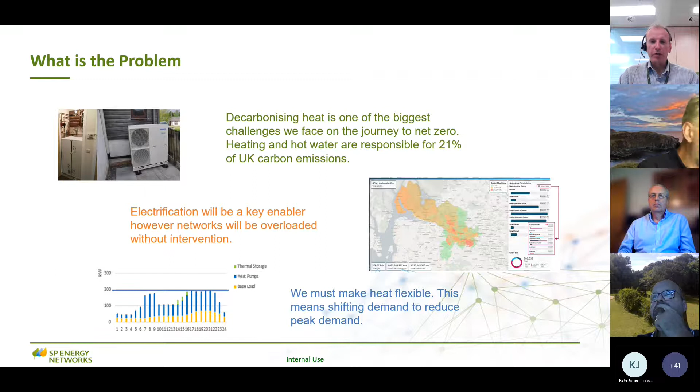And through flexible heat, the method we've been investigating is using smart control systems in conjunction with domestic thermal energy storage to unlock that flexibility from heat. And we've assembled this strong group of partners that you see here to work with us on the discovery phase project. Next slide, please, Kate.

So in terms of the opportunities that we've been investigating, firstly, there's the technical solution as an alternative to network reinforcement, and that's smart control from the DSO regional control system through service provider and aggregator platforms to the end user consumers with the heat pumps and potentially thermal energy storage in their homes.

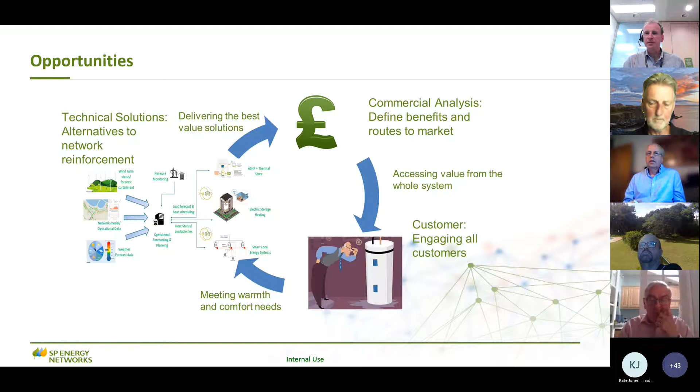We've been looking at the commercial side of things, so how can customers be incentivized to use this solution? What are the benefits, particularly for the electricity networks as well as other parts of the energy system? And we recognise that customers are key to this. Customer engagement is crucial, so we have a specific work package on customers. So I will now hand over to Jeremy Harrison from Delta. Thanks. Thanks, Watson. Okay, next slide, please.

So, as Watson said, the key focus of this project has been about the need to provide flexibility which will avoid or defer network reinforcement. So that is the key priority overall, and that's the one that we note here in terms of the user needs. But there are other benefits and other needs which are being met simultaneously.

So although we focus on avoiding the network reinforcement, in doing so, we also capture some other benefits for the wider energy system, for example, by minimizing curtailment of renewable generation. That has benefits for the ESO and, of course, to wider society. The alignment of heat demand and electricity generation has benefits to the end consumer in terms of possibly lower cost of energy during the periods they need the electricity, and of course, again, to the network operators as well.

And the other benefits there accruing to other participants, other stakeholders in the energy system, right down to the bottom where you have the carbon intensity of the electric heat by shifting the load from high carbon intensity generation periods to lower periods. That has a wider societal benefit. The next slide, please.

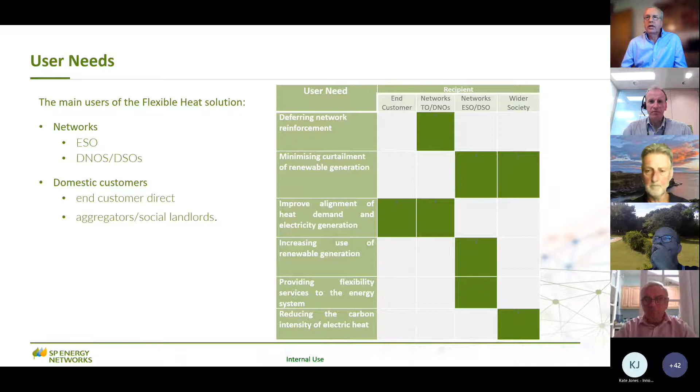So this project is focusing on, as I say, the shifting of load from peak to off-peak periods to defer network reinforcement. And this is predicated on the assumption that the decarbonisation of heat through electrification is by replacing natural gas-fired boilers in central heating systems with heat pumps using renewable electricity.

So just as a baseline here, a diagram for those of you who aren't familiar with them, typically in a normal central heating system, you have a gas boiler with a primary circuit feeding radiators with hot water, and also within that circuit you have the domestic hot water cylinder providing sanitary hot water, and sometimes a buffer tank to provide some sort of capacity in the system to manage the way the heat pump works. So this diagram here shows the baseline operation with a central heating programmer deciding when the heat is required and the temperature it's required at, but with no communication to the outside world.

So there are two components here. One is looking at the way in which we manage that controller from what Watson referred to earlier, the regional control platform. But then there are also the physical assets, the storage of energy in terms of the domestic hot water cylinder, the buffer tank, and also within the fabric of the building itself.

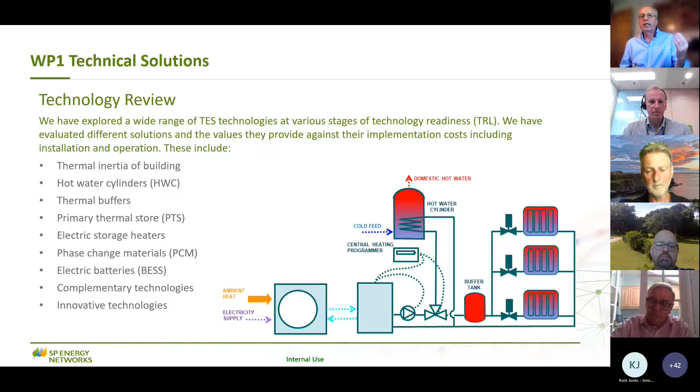So the technologies we looked at, starting off in a kind of hierarchical fashion with the simplest interventions. So using smart controllers to capture the value of the thermal inertia in the building itself, because we believe this is clearly the lowest cost intervention, and then progressing through the hot water cylinders using thermal buffers and then primary thermal stores and other technologies, including more advanced concepts like phase change materials, and also indirectly using electric storage as a kind of a proxy for the heat. And we also looked at a number of complementary technologies and innovative technologies, and as I say, in a hierarchy from the lowest to the highest cost. The next slide, please.

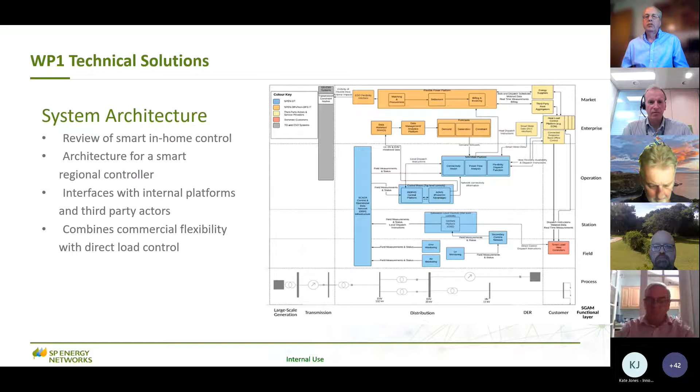And then, of course, there's the overall control platform. I'm not going to talk very much about this because I think that Kenny from Connected Response will talk a bit more in a second. But just to say that the layers that we're looking at are the intervention with the home central heating programmer using a behind-the-meter technology, and then aligning that with the demands of the wider network. And of course, in between that, there is some kind of mechanism which combines the commercial flexibility, adding an economic dimension to the smart control. Next slide, please.

And the simple conclusion that we found, not a great surprise, is that it is possible to use the thermal storage technologies to provide some level of avoided peak load. What we wanted to demonstrate, though, was whether that was going to be a more cost-effective solution than network reinforcement. And in simple terms, this summary of one of the scenarios shows from left to right the simplest intervention, the one in relatively dark blue there with the 688 above it.

That was for a simple controller which simply switches off the heat pump during periods of peak demand to reduce the demand on the system, and uses the thermal inertia of the building to maintain a certain degree of comfort during that period. But of course, it's a fairly crude solution, and some people may find that that doesn't give the level of thermal comfort that's necessary.

The next solution there, the one with the NPV of 1231, that is a smart controller applied to the same concept, which is to use the thermal inertia of the building, but rather than just switching it off, we elevate the temperature of the building prior to a peak demand period so that the temperature can then just drift down gradually.

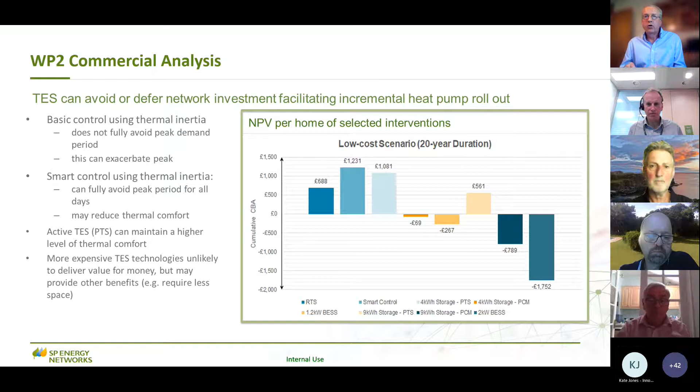Thanks, Jeremy. I'm Kenny Cameron, the Managing Director and co-founder of Connected Response. Our key focus is in the 1.5 million homes in Great Britain that have electric storage heating and hot water by fitting smart controls to improve comfort and cost, but also working with the likes of SP Energy Networks on projects in Glasgow, where we're doing a 10,000 flat rollout at a rate of 50 a week with Scotland's biggest landlord.

The starting point on this project as a team was to pose the question, what can we learn from the last major electric heating rollout, which was the rollout of storage heating in the 1980s, there or thereabouts. And the lessons from history on that would be that with hindsight, it was never really about customers. It was all about disposing of surplus nighttime nuclear generation. And so we were determined in this to say, if this is an even bigger rollout that has to be done, how do we take customers with us?

And for any of you that have lived with storage heating, you'll know what I'm talking about. No one in this day and age would ever launch a system and say you can only have our commodity of electricity for a few hours a day, starting at 11:30. So the key message is customers must embrace new technology or it won't happen. They must understand it and they must know what's in it for them. The transition needs to be done with customers, not to customers.

We've assembled a great team in this that Watson talked about earlier on, and a good diverse mix of SP Energy Networks, academics, manufacturers, energy services providers, consultants, and we all come to it with great projects we've been involved in. And when we sat down at a workshop at the beginning of discovery phase, the challenge was to say to all of us, forget all the glossy things, all the wonderful good news stories that we all preach about our projects, but what went wrong? What did we get wrong in these projects from a customer perspective, and what lessons can be learned from that?

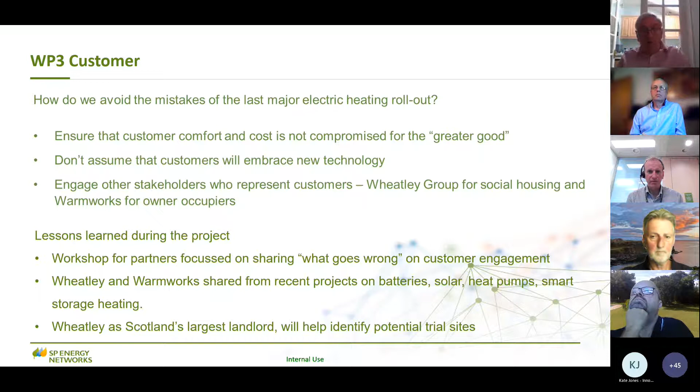Okay, so the next thing then, if you turn the slide please to the next one, was just to give you a brief overview of some of what's been talked about already and the 4 key elements within the alpha phase. There's 4 work packages. For the technical work package this time around, we were planning to bring in a new partner, and that's Smarter Grid Solutions, often known as SGS in Glasgow.

And they're going to be looking at a high level, a regional control platform, and what would need to be put in place to control all this dispersed and disparate loads. Within that package, there'll also be a close zoom in on the behind the meter control solutions to understand what controls are out there at the moment, what is the communication systems these controls are operating on, how much does that vary from building to building, how much does it vary across geographical areas, what's the interoperability, and what is the speed at which that service can be provided.

So all very important. The case study will be led by E.ON. It will be owner-occupiers as well as social housing tenants. The commercial and regulatory is to look at how the benefits will be split. Who should benefit from, say, flexibility revenue? Is it landlords? Is it their tenants? How will we disperse those benefits? And in regulatory, to look at some of the problems that might stop us from doing any of the things we want to do. So there may be a need for regulatory sandboxes to give freedom to the project if it goes to alpha, then beta, to do what needs to be done.

So the problem, again, is the electrification of heat. And as this graph shows, the current peak demand for heat is many times that of the current electricity demand. There's a huge variation in heat demand between seasons as well as within each day. The demand for heat doesn't necessarily correspond with the output from non-dispatchable renewable generation sources. So in terms of the future energy system, there's going to be a huge requirement for long-term, large-scale energy storage of all kinds in order to balance that system. Next slide, please.

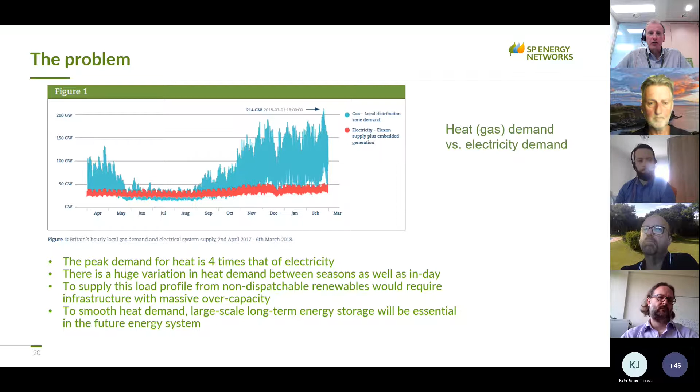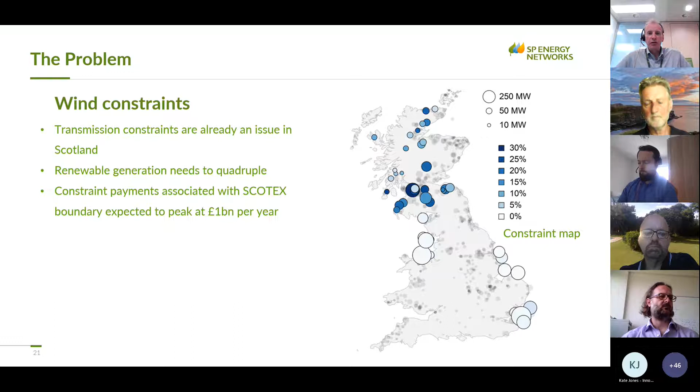We also have a problem with transmission constraints on wind generation. As you can see from this constraint map, the particular issue is from north to south, so generation connected north of the border being transmitted to the south. And we know that renewable generation needs to quadruple in order to meet our net zero targets. So it's a situation that's expected to get worse, and the constraint payments associated with that Scotland-England boundary are expected to peak at £1 billion per year. So next slide, please.

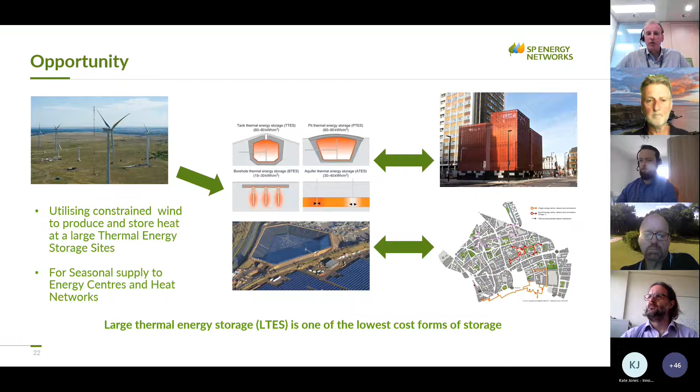So the opportunity that we see, in simple terms, is to use the curtailed wind energy, particularly in Scotland, to charge large-scale thermal energy storage, which can then be used flexibly to supply heat to heat networks. As I mentioned, all forms of energy storage are going to be important. Large-scale thermal energy storage is one of the lowest cost forms of energy storage. So, next slide, please.

So to the discovery phase of the project again, we've assembled this strong team of partners to work on it with us. Two main areas of focus: a technical work package looking at the practicable options for large-scale thermal storage in GB, and a commercial work package that looks into the benefits for the wider energy system, particularly the electricity networks. So I'll now pass you over to Bobby Joe Milligan from Ramboll.

Yeah, so the next stage then through the technical development was to look into what the user needs are for the network and for this sort of opportunity. And we've identified that the two key benefactors are going to be obviously the electrical network and distributors, as well as existing and new district heating networks. And we need to provide a way of identifying a pathway to deployment of such a large thermal energy store,

as well as, oh, I've just lost your presentation there. There we go. I think that was just me having a blip with the cable.

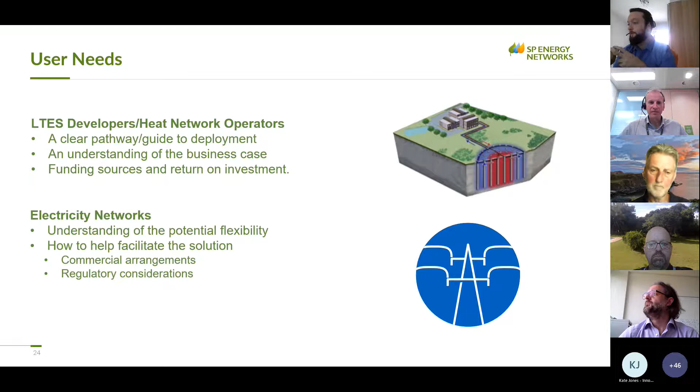You're all right. Understand the business case for developing a large thermal energy store and how that sits within an existing district heating or a new district heating network potential, and as well then what key geology requirements there are for capacities of district heating networks. The other thing then, of course, is the parallels with the electricity network: how does the distribution work, how can the solution be facilitated, and what is the full potential of the flexibility that's there for using curtailed wind or constrained wind. Next slide, please.

So large thermal energy storage is an existing concept and it's utilised quite heavily across Denmark, the Netherlands, and all the other Nordic regions. It's an active way of using renewable power usefully whenever it's out of phase with the demand of electrical networks. So as we've been saying, your electricity may be constrained at a time when your heating isn't required, obviously your summer months. And so large thermal energy stores can be used in the meantime to store the energy and use it whenever it's not going to impact your high capacity electric network.

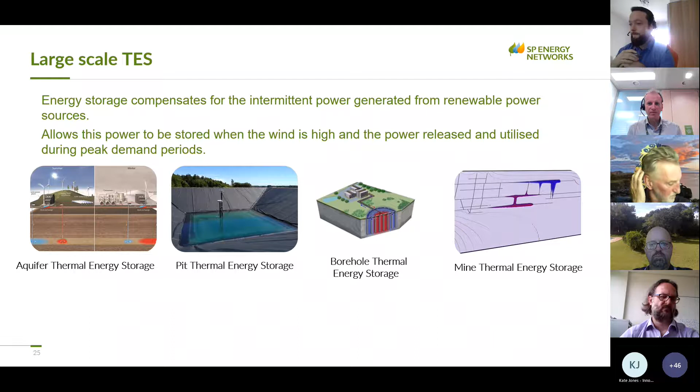4 key item types identified. You've got your aquifers, your pits, your boreholes, and your mines. There are many examples, ranging from the 8 to 10,000 meters cubed all the way up to the hundreds, and the most recent in Graz is 800,000 meter cubed capacity. Next slide.

So the findings through the technical work package were that there is this difference between the electrical constraint and the demand for heating. And so the electricity network can use thermal energy storage as a way of frequency response and balancing. As we've said, heating is going to move away from gas and there's going to be this higher use of electricity for heating in the network. And so even though at the moment there's constrained use and we're using capacity that's otherwise unused, we're still adopting the highest options. It's not a matter of just throwing immersion heaters everywhere. It's looking at COPs of more than 4 on heat pumps and that sort of technology.

When looking into the geology of the UK, we've looked at the level of aquifer potential and we've identified about 4 million gigawatt hours, which is an unfathomable number when it comes to the demand for heat and its utilisation. As well as in the Midlands, there's the identification of mines that have huge potential. You know, there's projects underway at the moment, not using it as storage, but using it as a direct use for heat in the likes of Newcastle.

And there's a significant expansion of district heat networks at the moment through the Green Heat Network funding and the HNDU project. So we could see in the future a much greater potential need for thermal energy storage when we're looking at heat networks. And I'll pass off to Daniel.

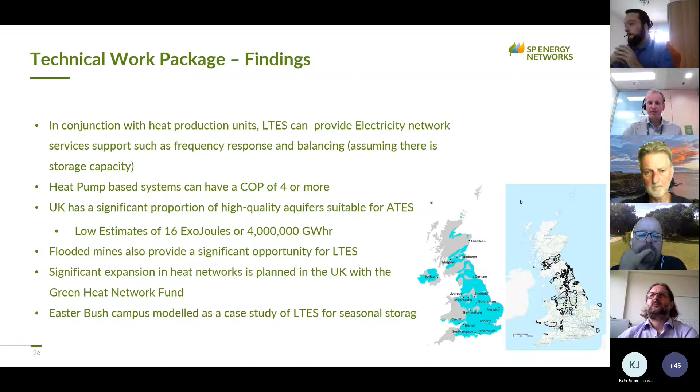Good afternoon, everyone. So I will talk a bit about the commercial work package. One of the things which Watson said is that we have this massive mismatch between heating demand in winter, which is massively larger than in the summer. So we need to supply this from non-dispatchable renewable power plants. And if we quadruple our renewable generation and we get rid of all the gas generation in the electricity system, we also get rid of quite a large chunk of flexibility in the system. So we need to add this flexibility back into the system so the network operators can run their system most efficiently. And this is where storage comes in, from short-term storage to longer-term storage to balance between seasons or months.

So this is basically wasted renewable capacity, which we have already paid for to build these things, and now we're paying extra to curtail them. So we should use them more efficiently, and this would then reduce the need for backup generation in winter. So these are sort of the general benefits seasonal storage can have, or storage in general.

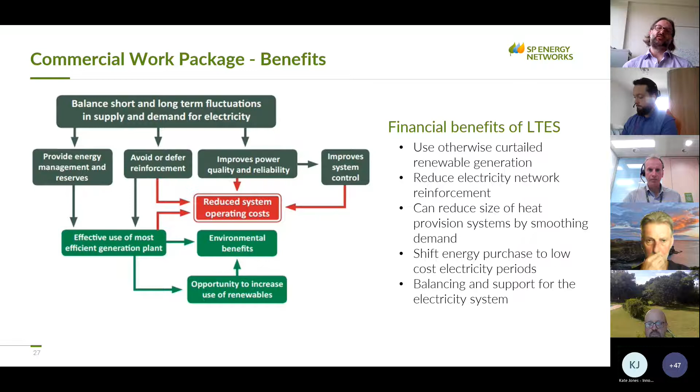And we can shift the energy purchase to low cost electricity periods, and this can help us balance and support the electricity system. Next slide, please, Kate.

So we showed a positive internal rate of return for these projects, but we also showed that we can reduce the need to strengthen the connections between Scotland and England with this. So for Kilgallioch wind farm, which is one of the most heavily curtailed wind farms, about 30% of its output is curtailed, we can run about 100 of these district heating networks.

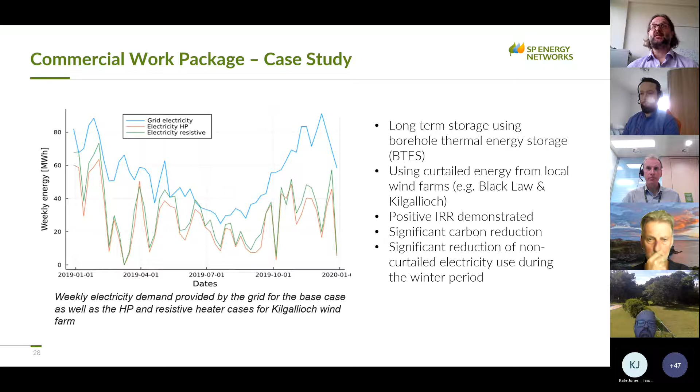So looking ahead to the alpha phase, the discovery phase showed that it can work. All the bits of the technology exist, but it hasn't been implemented in the UK, and there have only been very few cases where it has been implemented as this multi-stakeholder system. Usually seasonal thermal storage systems are run by a single company who also owns the district heating network. Here now we are looking at a multi-stakeholder system where we have the district heating network operator, the storage operator, as well as the grid.

So we need to think about more commercial frameworks as well as regulatory frameworks. So the regulatory frameworks and barriers for the heat storage, how that links to the network to ensure everyone can sell their electricity, has enough heat for the winter. So this is the main problem, that the technology exists, but we need to provide blueprints to roll out this technology at scale in the UK.

So we will look at a guide and evaluation matrix to look at archetype district heating networks linked to curtailed energy as well as subsurface storage in the UK. We will have a closer look at the socio-environmental factors, because people might not be happy if we heat the ground below their feet or we reuse old mine workings. So we need to look at the social implications of this as well as the environmental implications.

And finally, we are going to develop a demonstration project which can act as a living lab to de-risk future schemes, to test this integration, and to pave the way for a massive rollout of this technology, which could save a significant amount of money as well as emissions in the future.

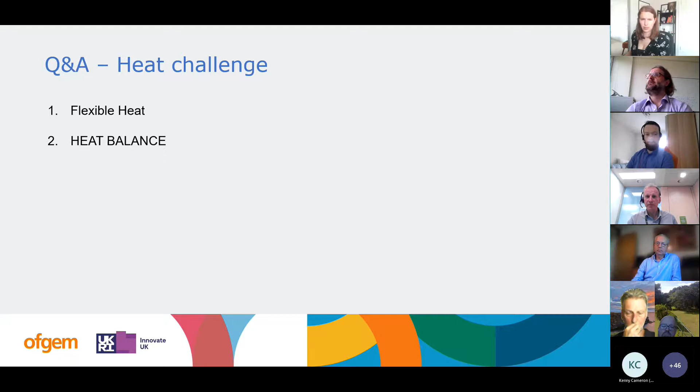Okay, let's have a look at some of the questions we've got in here.

Okay, so coming to the flexible heat project first, what sort of duration of storage in approximate hours were you looking at to get the main benefit of avoiding peak loading of the network? Okay, so generally speaking, the peak electrical demand on the system occurs between 5 and 8 in the evening, usually the very coldest day of the year in the middle of winter. So the modelling was focused on avoiding any electrical demand during that period. It was a fairly simple model where, as I say, we prioritised avoiding electrical demand during that period.

But the modelling was based on a generic network. It wasn't looking at a specific location. And in the alpha phase, we will be focusing more on an actual geographic location and a real network, and looking at the actual load profile on that network. But generally, it's between 5 and 8.

Rather than just looking at the coldest winter day, though, what we did was to take half-hourly periods right through the year, because we wanted not just to look at can we avoid power consumption during that period, but what is the impact on, as I mentioned before, the wholesale time of use cost of electricity, the carbon intensity of the grid at various periods. So we did that throughout the whole year to understand the value that shifting from that period can achieve.

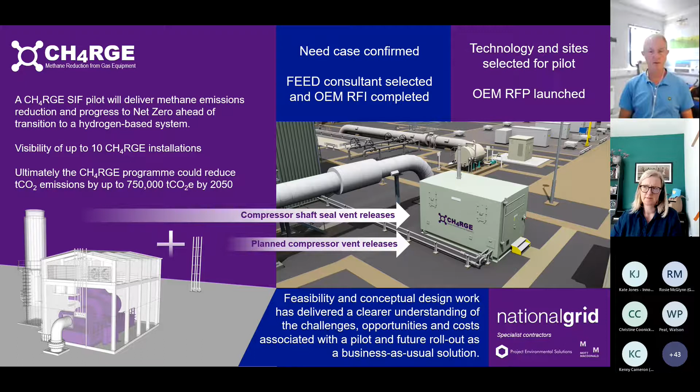Thank you. Thanks, Steve. So as Steve's outlined, we were lucky to start the SIF discovery phase with a fair amount of momentum. We had proved our need case and we demonstrated feasibility of our technologies, and we'd narrowed that technology selection down to methane capture and recompression, specifically of emissions from process vents and seal gas vents.

We'd launched an RFP, and with the sprint nature of SIF, we'd asked for a fairly rapid response and turnaround from our OEMs, the suppliers of these technologies, and we allowed them a phased return basically just because of the speed and nature of our request.

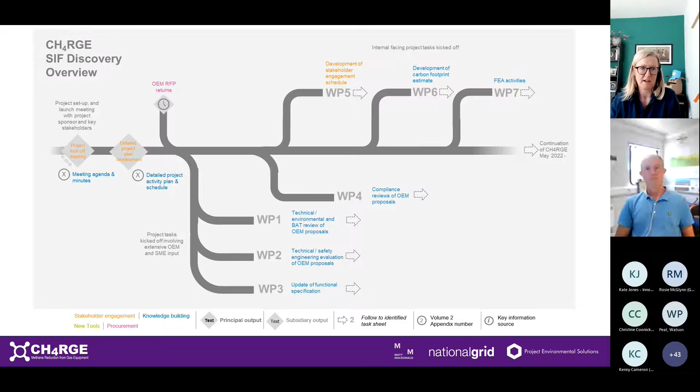As I say, we'd already demonstrated in an earlier stage of the project that the technologies in question were feasible. We believed them to be feasible. And really, we were now assessing the readiness and how developed their conceptual designs were. Tasks 5 to 7 were internal facing project tasks, really aimed at moving the project towards that pilot study and rollout as necessary. So those are pre-works.

The focus of the technical and commercial evaluation was to look at the readiness of the designs and to consider whether those designs had taken into consideration all of the integration and safety issues that would be of concern to National Grid. So there was a significant amount of high level compliance review.

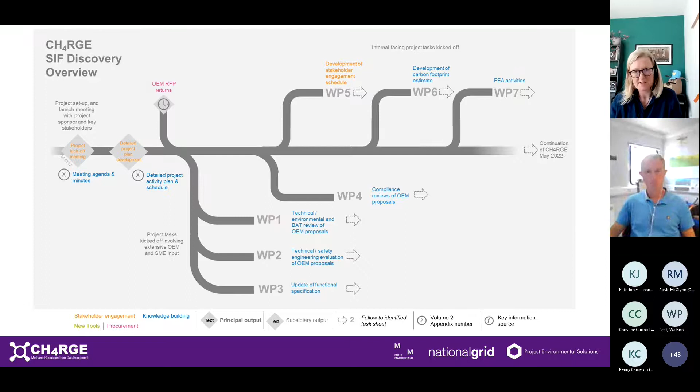We engaged with a series of subject matter experts from within National Grid and the FEED contractor to look at the functional specification that we might eventually issue out to any selected supplier.

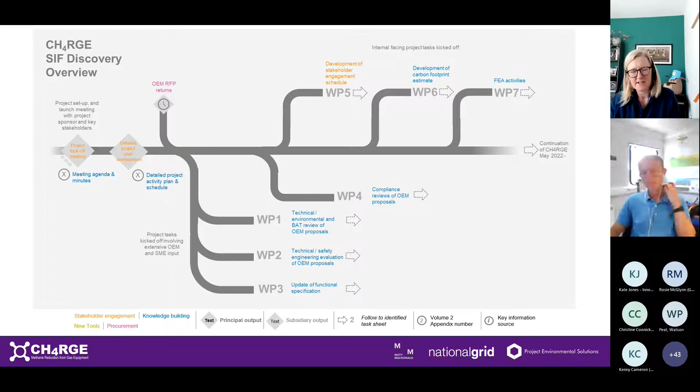I'll just check Mab's on the call because I can't see his name. Yes, I am, Gemma. Oh, you are. Perfect. Okay. If you want to pass on to the next slide, I'll hand over to Mab to go through some of the outcomes and achievements of those 7 work packages.

Hello, everyone. Mab Rashid from Mott MacDonald. I'm acting as the design coordinator from this company's side, and my background is in process engineering. I'll take you through a quick rundown of the kinds of activities we engaged in for these work packages, focused a little more on the procedure rather than the eventual results.

Just in case people in the audience are curious, we started this process thinking that there would be one eventual winner, and we do indeed have our favorite vendor and second favorite and so on. However, it's too early in the process to go into those details, we feel, because there's still a great deal of design work to be done, which the vendors will themselves bid for.

So to give you a quick rundown, work packages 1 and 2 were technical, safety, and engineering evaluations. This was really looking into the nuts and bolts of the proposal put forward by the vendor, as early stage as those were. It was to look at whether the vendors had thought about the typical operational problems and the typical issues that come up in a realistic implementation.

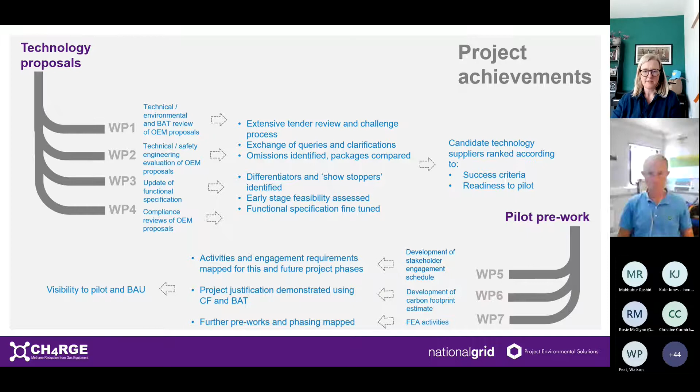And then we mapped out future and further pre-works and phased those formal environmental assessments that would be necessary to take the project forward. And all of that basically, as I say, is a step along the road to an eventual pilot. Next slide, please.

The outcome, Gemma... hi. Oh, should I take over some of this?

Yes, sure. Okay. So to continue our story, the recommendations that we can inform all of you of at the end of this SIF discovery process are outlined in this slide. We are going to continue the request for proposal process, the RFP process. It doesn't come to a hard stop at the end of SIF discovery. There are still plenty of questions to be answered, plenty of clarifications to come from the vendors. So we expect this to go on for quite a while.

And alongside that, we'll have our discipline specialists from Mott MacDonald and discipline specialists from National Grid asking the relevant technical questions, probing further into the designs and looking for strong points and weak points. The eventual aim in the next few months is to get to fixed delivery costs for the pilot studies that the vendors will do. Now, they themselves are tasked with producing a cost estimate for the design phase of the work that they would each go through.

And when we're looking at those cost estimates, we're looking for a realistic proposal given how mature their designs are. So for instance, the designs which are less mature would need a lot more work. We expect them to cost for it. So that's the approach we're taking. As I mentioned, a preferred supplier will be taken forward, hopefully later this year.

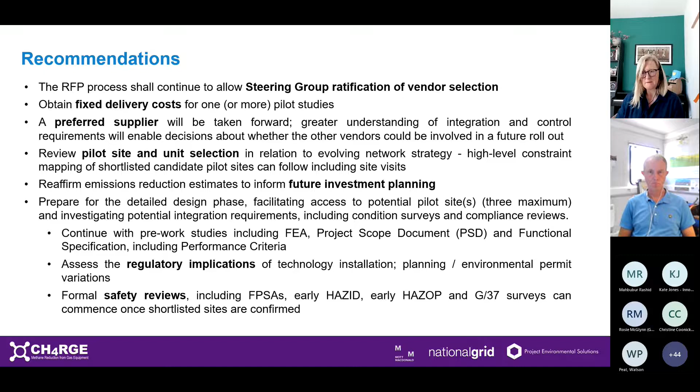So this is our intention for the next phase. Although we would say that SIF discovery has been, on the whole, successful, and we have taken the project forward against all of the work packages as outlined in the left-hand column of this page, there has been good news in that the project might be taken forward via an alternative means of funding. That might allow us in the next 6 to 9 months to continue to work on the aspects that Mab has just described,

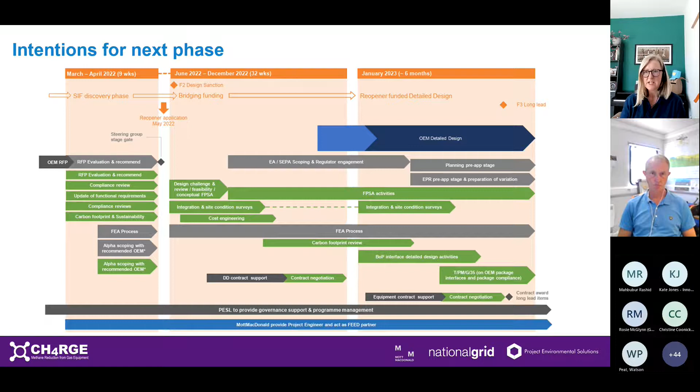taking us towards detailed design, rechecking and reassessing those emissions reduction estimates, and considering in more detail the site and unit selection. All of that we believe would take us to detailed design starting early 2023. And if you flip on to the next slide, we would be in a pilot build and commission phase early 2024.

And beyond that, depending on the appetite for rollout, we could commence potentially multiple pilots alongside that first one on a staggered basis, testing those different suppliers on those different scenarios and operating systems on the network, and then on to rollout if that's where the project takes us. Next slide.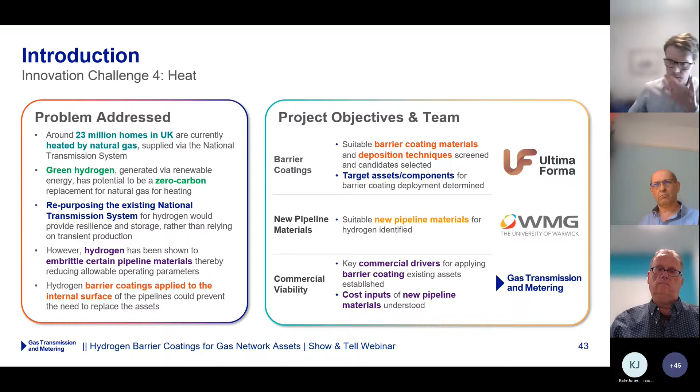So we'll talk through each of the work streams in turn, and we'll start with the hydrogen barrier coatings. So the first step here was to communicate our user needs of a barrier coating to Ultima Forma. We did this via a series of meetings with subject matter experts from National Grid, in which we prioritised gas-facing assets and captured pertinent information to feed into the coating material and deposition selection process.

So the kind of things that we communicated over to Ultima Forma were the material grade, the surface condition, whether it had a coating or not on the internal surface. So that helped to identify the materials compatibility requirements for that. Other things such as the geometry and the access constraints, whether the component could be removed from the system or not, whether it had to stay in situ. All of those things would feed into Ultima Forma's selection of a suitable deposition process and also the materials that

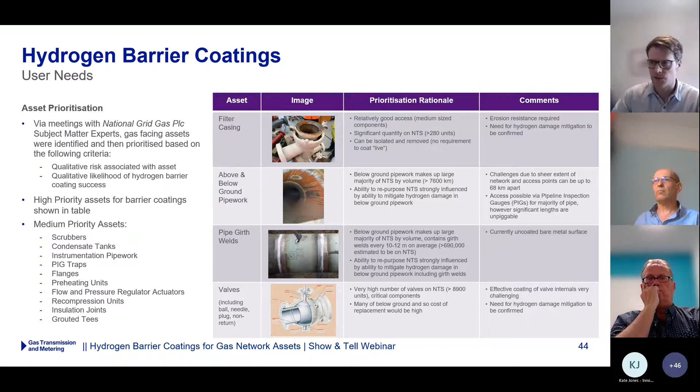Of the practical materials, the metals provide significantly lower permeation values at room temperature than polymers, about 10 billion times lower. And of these, a subset of candidate materials was identified that we could apply with well-developed technologies and at an appropriate scale. And these tend to be densely packed metals without their own hydrogen embrittlement characteristics that are readily available. Next slide, please.

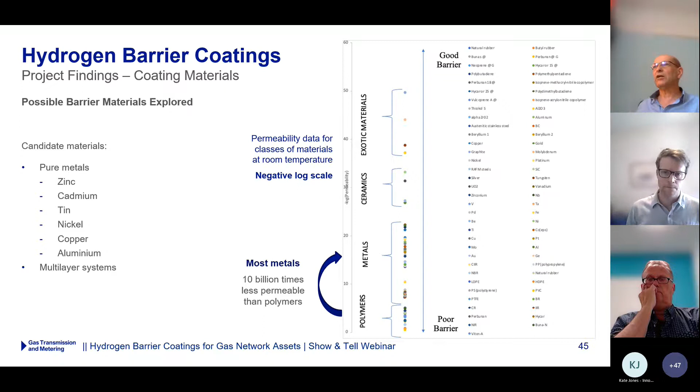So with this subset of metals in mind, we explored the potential deposition techniques that we could actually apply to National Grid gas network assets. We considered a wide range of aspects, including the coating thickness that we need to achieve, the volume of material that you need to be able to do that, any waste products, the quality of the coating, preparation and post-processing steps, and any significant process conditions that would be really difficult to achieve, like a high vacuum, for instance, that would be complete showstoppers to apply into the network.

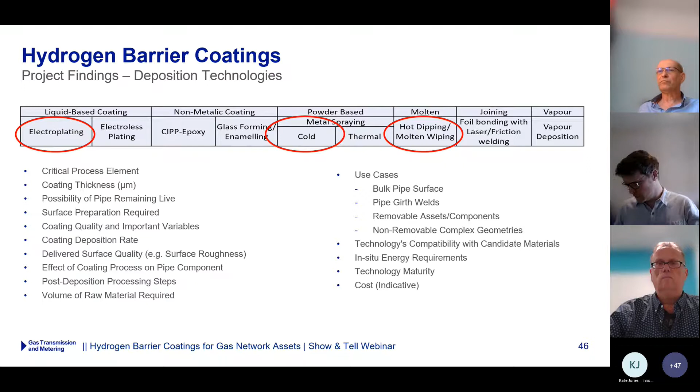So part of that consideration was to think about the preparation methods that will be needed to convert the existing network and the existing condition into something that we could apply a coating to. We made a visit to the National Grid Ambergate site, and that was very informative in trying to understand the real condition of the pipeline components when they're in service.

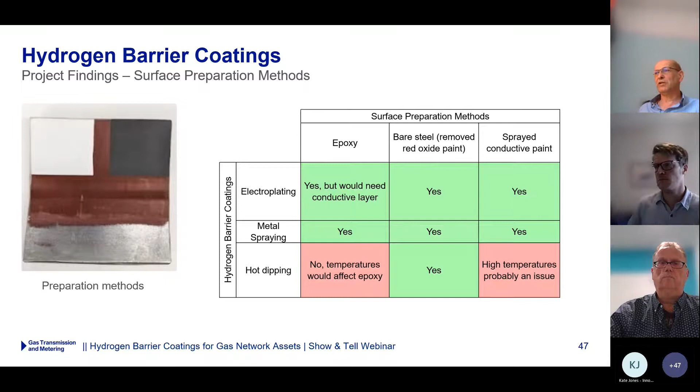National Grid provided us with some samples, and we ran some trials on some of the preparation techniques, things like scratch brushing, grit blasting, chemical pickling, and so on. And these studies showed that there's a range of preparation processes that could be applicable for different barrier coating methods and allow some flexibility in the approach that we could use for different asset types. Next slide, please.

So the combination of coating technology and candidate materials demonstrates that there are feasible solutions here that could provide a range of possible different solutions for different situations within the National Grid gas transmission network.

We also considered the indicative costs for the material systems that we might apply based on coating a unit area of 1 square metre. And these calculations include the material and processing costs, but they don't yet include the cost of implementing that inside the gas transmission network. That's something that we'll have to develop further in the Alpha project.

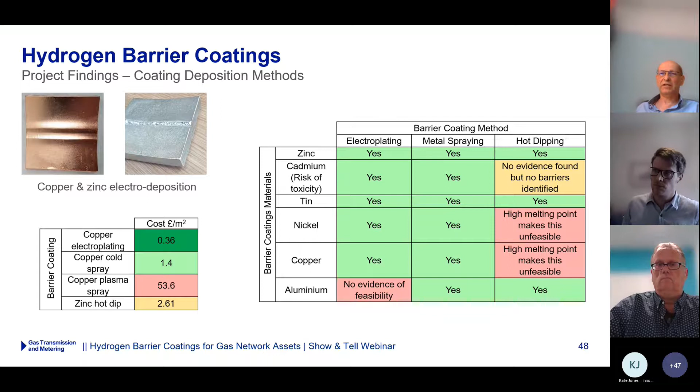But at least it can be seen that there's a range of price points here with several relatively low cost technologies. And these will be investigated for implementation further in the Alpha project phase. So next slide, please.

So in summary, for hydrogen barrier coating materials, there are materials and application methods that have been identified that are feasible for providing an effective hydrogen barrier coating to National Grid assets. And there are different solutions available for different types of asset situation and type.

Going forwards, it's going to be necessary to turn this feasibility into practical engineering solutions, and this includes a complete coating system, surface preparation, the application method, the material system, verification of that coating method, and assessment of the durability. So that will allow us to build up and get a system that could be applied in situ into the National Grid gas transmission network. So Rob will present our plans for how we intend to do that in the Alpha stage later.

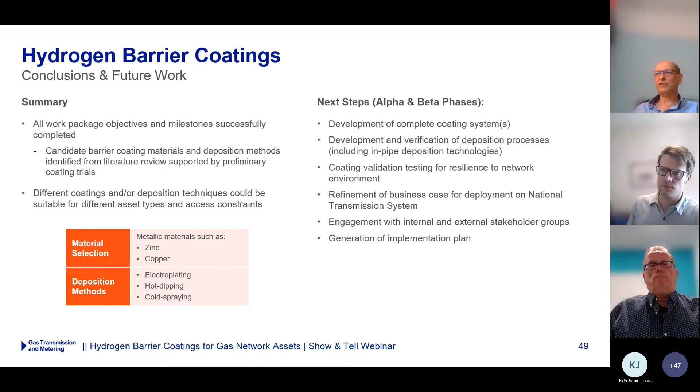But for now, I'll hand over to Tom Pice at the Warwick Manufacturing Group to introduce the new pipeline materials work package. Thanks, Tom. Actually, just before that, I'll talk through the user needs. So thanks, Andy. So yeah, that slide, thank you.

The user needs were communicated via a workshop with WMG and National Grid subject matter experts again, and the existing steel pipeline standards were used as a benchmark. What we currently have is what we would like going forward, obviously without any hydrogen embrittlement risks, with a potential increase in pressure and gas velocities to account for the lower energy density of hydrogen compared to natural gas. So if we move on to the next slide, I'll give Tom the floor.

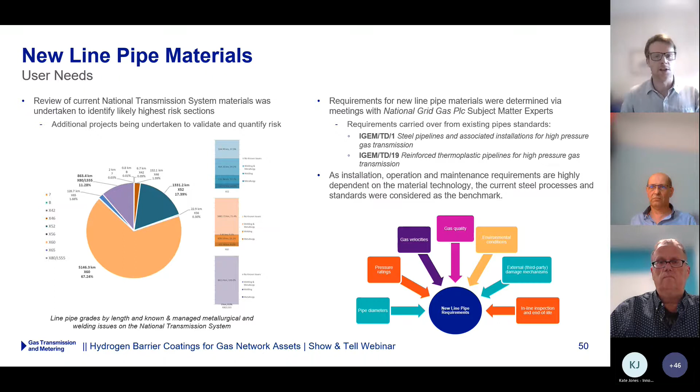Thank you, Robert. So yeah, at WMG we looked mainly at identifying the state of the art in plastic and composite pipelines. What sort of solutions are there out there already, and we also looked a little bit at what sort of solutions could come in the not too distant future. In that area, we identified basically two technologies. One is a glass fiber reinforced epoxy pipe, and we also identified the reinforced thermoplastic pipe systems.

So glass fiber reinforced epoxy pipes, they're already used in the oil and gas industry quite regularly. They can be produced at large diameters, which is necessary for transmission pipe systems, and they are able to withstand high pressure ratings. And they're produced typically at lengths of about 10 to 12 meters, which is relatively similar to the steel pipe that is already in use.

The thermoplastic pipes, on the other hand, can be produced almost at infinite length, but for practical reasons they're limited to maybe 1,000 meters because they are spooled. But the problem there, with regard to using them as transmission pipes, is that because of the spooling, the diameter is limited to around maybe 6 to 10 inch. So relatively small pipes there.

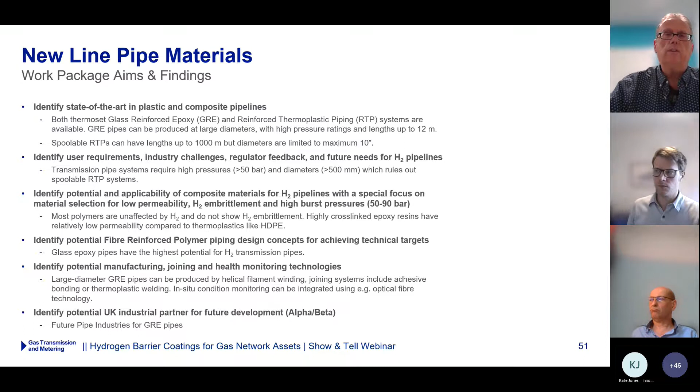These pipes, at least within the polymer pipeline system, have quite good hydrogen permeability resistance. They can be produced, as I mentioned, up to large diameter. There are pipes for wastewater made up to diameters of 2 meters. They are unaffected by hydrogen embrittlement. They don't suffer from corrosion, and also have quite a low environmental impact.

If you do an LCA analysis of a polymer pipe system versus steel, they have quite a low environmental impact. Joining technologies are available by adhesive bonding. Current pricing of a 500 millimeter pipe would be around maybe 350 pounds per meter. Next slide.

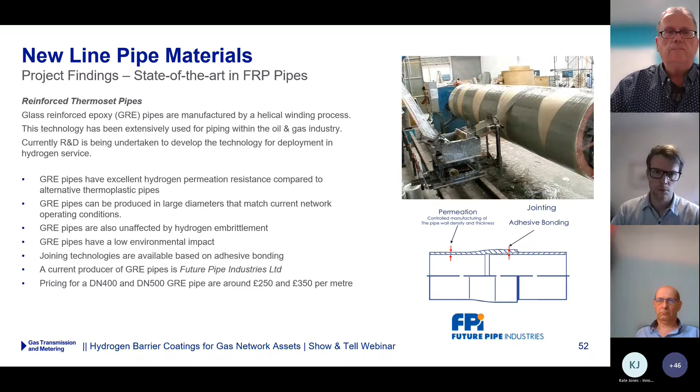So as an alternative, as I mentioned, in the market, and there's quite a lot of movement in this area, is the use of reinforced thermoplastic pipes. I think this is a very interesting technology because these pipes can be made in a continuous process. The process involves basically an extrusion, which is a continuous, relatively cheap process.

So, for example, you could extrude a pipe by co-extrusion, that means extruding 2 polymers at the same time, where a polymeric layer based on ethylene vinyl alcohol, which has very low permeability, can be included directly in the process. But as I said, the technology out there is mostly limited to smaller diameters, which maybe rules out this technology for transmission pipes. Next slide, please.

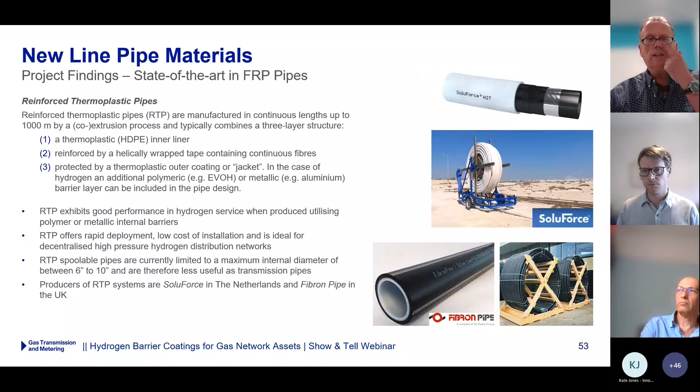So in terms of summary, for replacing steel pipes with composite pipes, glass reinforced epoxy pipes are probably currently the most suitable. The technology is basically available. There are some issues that need some attention. For example, if we go to really high pressure, higher than 50 bar, close to 90 bar, the current pipes on the market are not all there yet.

And also in terms of very large diameters for hydrogen at these very high pressures, I think at the moment most piping systems are at 600 millimeters. If you want to go to 1 meter, that would need some development. Of course, because these pipes are made in sections of about 10 to 12 meters length, the weakness of the whole piping system will probably be in the joining technology, because the system is only as good as that.

And there are still quite a few unknown factors in terms of the permeability at the joint, but especially in how this is done in the field, because this is done by adhesive bonding. Joining technology in steel pipes, welding, is very established, and the welders in this industry are probably some of the most skilled and qualified welders available.

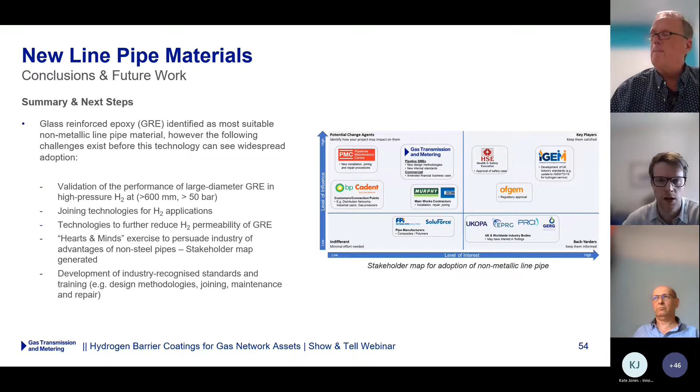So just very quickly, we're moving into the alpha application, and we're concentrating on barrier coatings going forwards. The composite pipeline materials workstream will be pursued via other alternate funding routes, but for alpha we're going to narrow the scope slightly to just looking at barrier coatings.

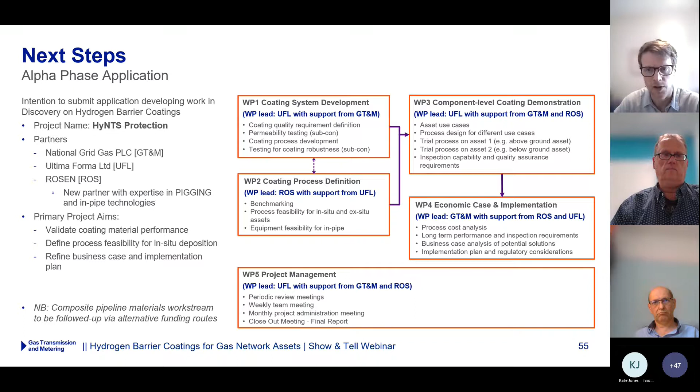So WMG will be leaving the consortium and Rosen will be joining it. They're an expert in inline pigging technologies, and the aims of this project are to validate the coatings that Andy's talked about in terms of performance, define a process feasibility for the in-situ deposition, which will be led by Rosen, and then refine that business case and develop an implementation plan. So next slide.

And then just to summarize, we completed a successful discovery project looking at barrier coatings and new line pipe materials. The project was delivered on budget or slightly below budget and on time. Two technical reports will be uploaded to the Smarter Networks portal. And as I just mentioned, the alpha application called HyNTS Protection will focus on barrier coatings with gas transmission and metering, Ultima Forma and Rosen. So thank you very much.

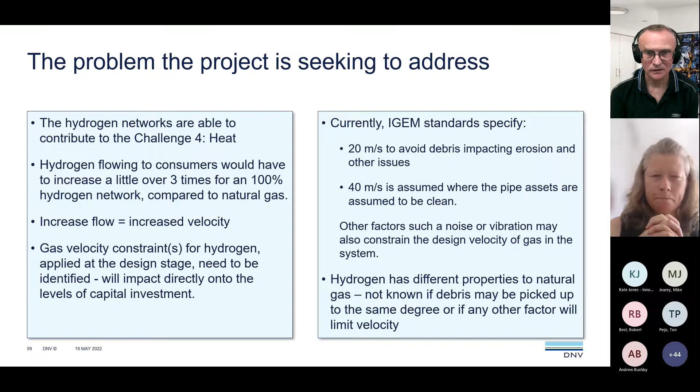We did a literature search to see, with hydrogen and anything else, to be honest, what are these constraints? Is it moving the debris about, erosion of the pipe, erosion of customer equipment? Do the standards help at all? So we've got TD1, which is high pressure stuff, TD4, which is lower pressure stuff, and TD13, which is effectively the stations and installations dotted about the gas networks to do useful things like valves and pressure regulation and the like.

Equally, those stations are things like compressors and the like. So do we have a different problem with hydrogen on things like noise? We wouldn't really want very loud noises to appear, or the thing to shake itself to pieces. Will it make a lot of vibration? The other thing that is interesting is, does hydrogen itself change the way erosion works? Is there something extra apart from just hitting things very hard with particles?

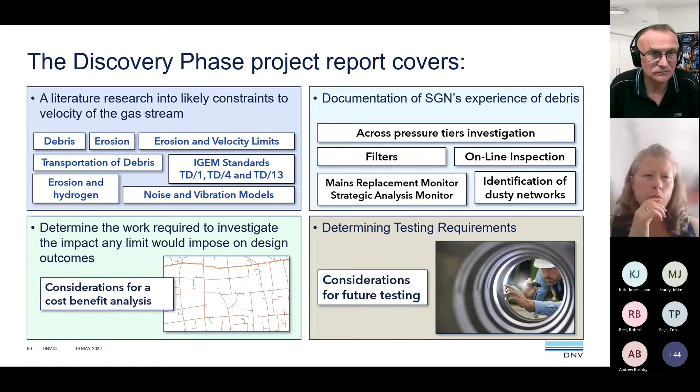So what did we find? We found a lot of quite interesting things. The literature search indicated two aspects which may well become important. It appears possible that erosion in hydrogen is different to that in natural gas, in that you may well be able to get enhanced erosion rates due to synergism between hydrogen embrittlement and particulate erosion. And there are relatively few papers that indicate there may well be something in that.

The other thing it showed is that moving the debris, particle transportation, would actually be significantly different in hydrogen to natural gas. Possibly it wouldn't be able to shift as much. On the experience of debris, SGN's experience is really that we find debris across all the pressure tiers. We find it all over the place. Some of the debris is different, but we find it.

In the medium and low pressure systems, it actually has quite an impact, in that you can end up having to clean out networks. It fills up filters, gets into valves, this sort of thing. And in our report, we talk about the types of debris, some of which are more surprising than others.

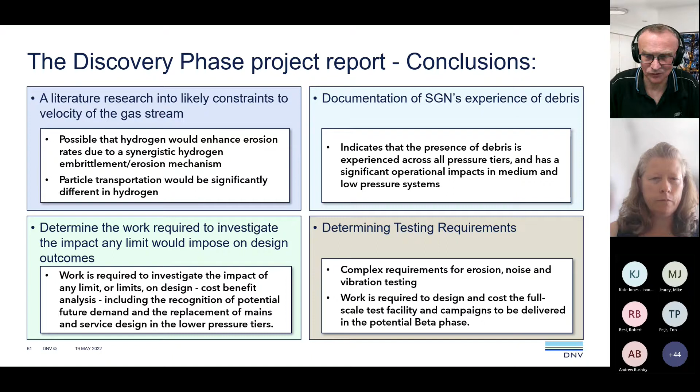So for alpha, I think we're maybe on the next slide, but what we need to do is to design and effectively cost building this full-scale test facility that will allow us to get some realistic risk assessments. So in alpha phase, what we propose to do is to go to all the networks and say, because we have SGN, but do the others see network debris? Is it different debris? And what sort of debris is it?

Part of that is getting industry engagement. So we get everyone to buy in, we go to the Technical Standards Forum, which is how the gas industry makes new standards, and direct ourselves towards producing a new industry standard for designing certainly low and medium pressure networks. As I say, Alpha will design and cost this full scale test facility and laboratory campaigns, which we potentially would deliver in a beta phase, because that would take time and probably be reasonably costly.

And then there's this complicated modelling to do the cost benefits of what's the balance between changing that gas velocity against increasing the risk of basically breaking something or causing inconvenience or loss of reliability. So one of the things in alpha phase, in addition, is to do some small laboratory tests to see if the synergism exists between hydrogen damage and erosion damage. People have done a small amount of work, but we need to do something a lot more real.

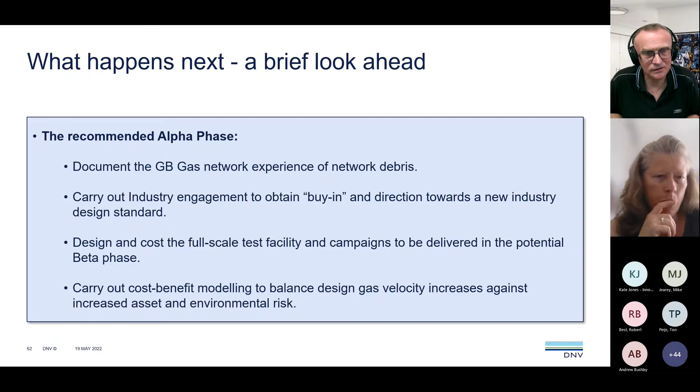I think that's fairly close. Have you got the next slide? Yeah, that's it. That's our part.

So yeah, we've discovered some interesting things. We've discovered one slightly worrying thing about the synergism, but we need to do some fundamental work to show that that is actually a real effect in the gas network environment. And do you get that effect with the type of debris the pipes have got, as opposed to sand, which is what people have used up to now?

I was just going to add in, Tim, if that's okay. On the literature review, we were unable to actually find any physical test work that enabled us to establish a safe design velocity limit. So that really led us on to saying, okay, as an industry, we need to do the testing, which is what the alpha phase part is about, to design the testing to then have the beta phase. Because there's not sufficient information out there to provide the test data, the evidence for it.